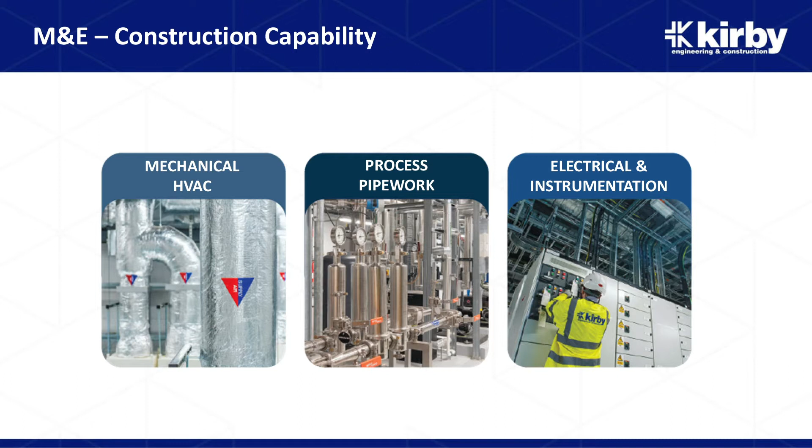Our trade labour split is 50-50 in Europe, and it's probably 60-40 in general across the business. As I said, we have a mechanical HVAC, process pipework, and electrical E&I capability.

And I touched on our transmission distribution. So again, we're looking at turnkey solutions there around the distribution network operators and transmission operators, renewables, large demand users. And we have a capacity up to 400 kV. We've done AIS and GIS substations, so it's all HV/MV transmission distribution networks.

And our commissioning - we have in-house commissioning teams and in-house engineering teams, which offers us a lot of value there for our clients and helps get this early contractor involvement going in the first place.

So I suppose today really is about technology and advancement and what's helped us to progress as a business. I'm going to focus on digital construction, touch on BIM capabilities, and Park is going to go into BIM a bit more on his side. I'm going to focus on off-site fabrication and how that's worked for us as a business in practice.

There's always learning, so we've had some key learnings from our large-scale projects, and we're moving on quite well as a business. We're going to look at integrated project delivery, in-house 3D modelling, detailed coordination, prefabrication, modularisation, how we've applied technology, and improved EHS and shared value back to everybody concerned, all partners on the projects.

The first thing is really to understand early contractor involvement, to understand what constructability and design issues can happen on our project at a pre-construction phase. It's to resolve the issues early so you don't carry it to construction, because what you don't want is a situation where there's multiple rework on your projects.

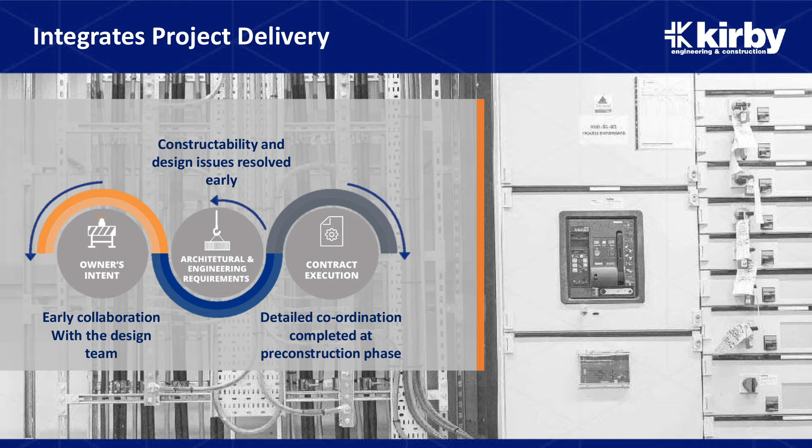We need detailed coordination, complete at the pre-construction phase. That's a full integrated solution for everyone involved, and we do need to understand what the employer's requirements are day one, so that we can get that collaborative approach. The more involvement we can get from all the key team members, and the support we can offer to a project, is where we add most value.

It's all about team collaboration. There's no one point of source here, or one point of truth. It's engineering, prefabrication, construction teams. It's about redlining, detailed coordination, and pre-construction, so early collaboration with project teams and design teams.

Pre-construction collaboration between Kirby's team, the FM and the BIM team. We can give visual representations once we take it into the BIM model. Sometimes we don't own the model. We have a preference to own the model because we have more confidence in the service we're providing, and sometimes it's quicker to take a model from scratch yourself and bring it all the way through to full LOD 500 and an as-built product, so our constructability and design issues can get resolved early.

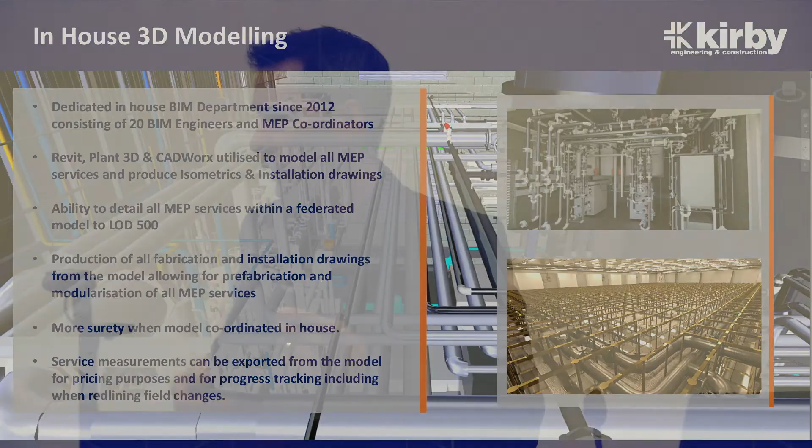Our BIM teams, from 2012, we had the opportunity on our large-scale project. We had 35 modelers. Rory and the guys asked, just over a quick bit of lunch, how many modelers worked on that large-scale project in Leixlip. There were 200 modelers working inside a room from multiple contractors at the time.

We had 35 modelers. We were learning, and we were getting more efficient as we went along. The churn rate now would take us a third of the time it would have taken initially, so there are learning curves, and you get more efficient over time and produce a better quality product.

We use Revit, Plant 3D and CADWorx to model all our services, produce our isometrics and 2D drawings out of a model, so you can look at clash resolution through the model. We have an ability to detail all the services, as I said, up to LOD 500. I'll touch on the LODs briefly in a minute.

We can produce all our fabrication and installation drawings from the model. Once we put all the services in there, we can get a dump out of the model and send it off for prefabrication, having confidence we'll be able to build to the tolerance levels allowed on the project. In Leixlip, the tolerance level on that project would have been up to 70 mil, so anything within that, you're clashing with other trade services.

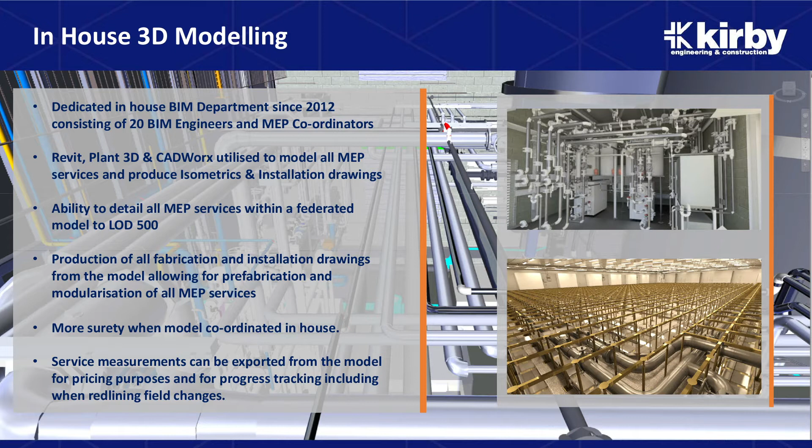We've more surety when a model is coordinated in-house, and again, service measurements can be exported from the model, so you can take a dump from a QS point of view. Being a QS myself, you can take a model dump of all the primary services, or sometimes the secondary services if they're on the model, and get your measurement, cost load quickly, and put it back through your schedules to track progress and efficiency.

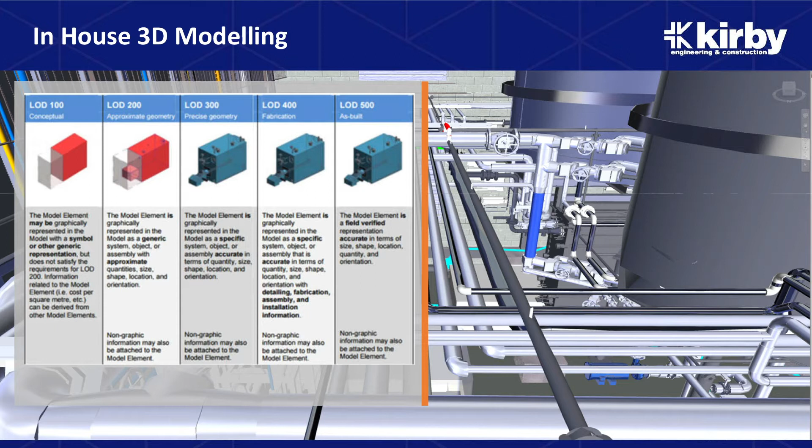The LOD 100 to 500 - are you involved at a concept stage? Is it approximate measurements or precise measurements you're producing? Are you going to build your model to a fabrication stage so you can produce 2D drawings and fabricate to those drawings with confidence? Or are you bringing it to LOD 500, taking it to full as-built, with total confidence in the product you're delivering?

All design information that we model is to a constructible standard. It reduces site time by using coordinated installation drawings, and it's all about reducing time on site.

We looked at our project in Grange Castle, which had north of 200,000 hours on the project. We wanted to achieve a minimum of 25% of those hours taken off-site.

So what we've done is we ended up off-site fabricating all the LV switch rooms. There's 24 of them in total, and they were produced with a partner up in Donegal. They basically came in sections of 4, into 3 co-locations in each of the 2 data centres we were working in, and they got bolted up together with all the services installed off-site.

They can be tested off-site, and all the quality inspections and everything can be done inside the fabrication workshops. So it avoids congestion on the site. That's the key piece - it reduces the management requirements on the site, and it just becomes much more efficient for the project.

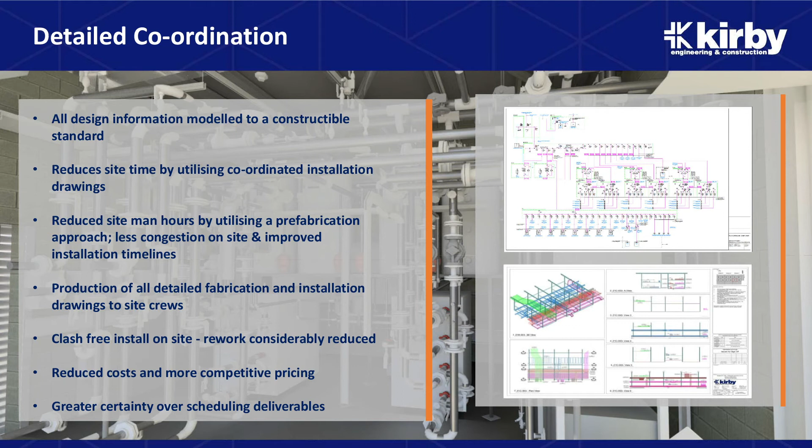So it's really about getting more surety. You end up producing 2D drawings which are there for fabrication. Our fabrication approach reduces on-site construction duration, reduces management costs and risk to the project, and results in a higher quality final product.

It's achieved in a factory environment. It saves costs - trades guys on site versus factory workers. There is a difference in cost there as well.

So the client would see the benefit of a more competitive price, and we would obviously be looking for savings ourselves when we go in - we go in with a tight price. All contractors need to make a margin as well.

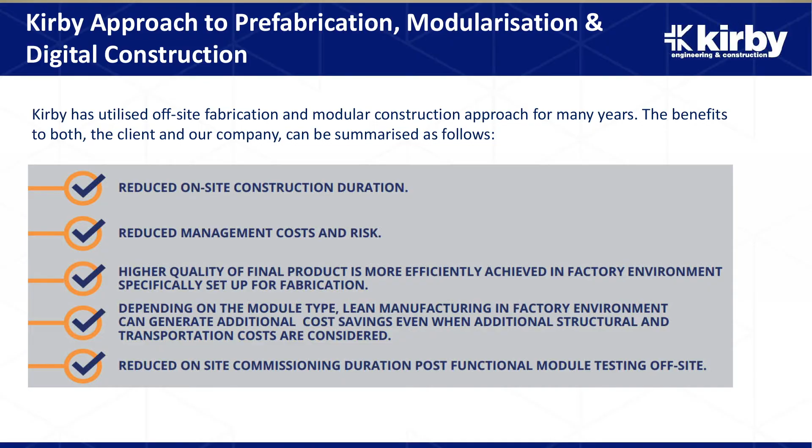So it's about lean manufacturing and cost savings, and when you take in transportation, sometimes off-site fabrication may not be cheaper, but it saves time, and the time to the project might be the most important thing. It saves the client costs in the long run, and it reduces on-site commissioning during the testing phase.

So the key to prefabrication, modularization, and the digital piece is early engagement, early collaboration between the teams. We get constructability and design issues uncovered and resolved at the outset, at an early stage.

We can give it through visual representations, we can take through the model once we have all the primary services and the primary routes on the model. We can have all the services.

The pre-construction collaboration piece is really important, because who owns the integrated model, and how much surety have we with the quality of the information in the model?

Detailed coordination is done through the BIM teams, through workflow, and it's about taking the design information to a constructible standard. It offers the opportunity to apply value engineered solutions to lean up the costs and the install, and it reduces man hours through coordination and man hours by prefabricating off-site.

We had a big learning back in 2012 with point cloud scanners. We did a project in 2012 - we were 60% through the project, and we were building a model and looking to resolve clashes through the model.

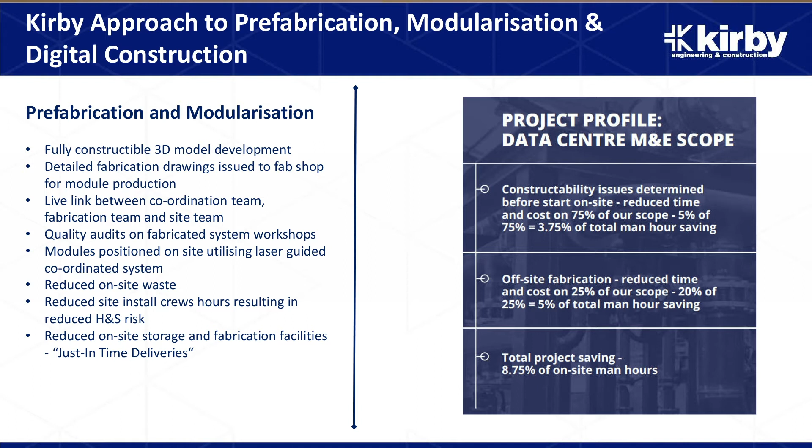It's laser coordination in the field, using point cloud scanners, and it's really about taking the risk off the site so that we can have a safer working environment.

A few examples for the company of off-site modularization: these are the switch rooms that were prefabricated and dropped into position, 24 of them for the company, fully containerized.

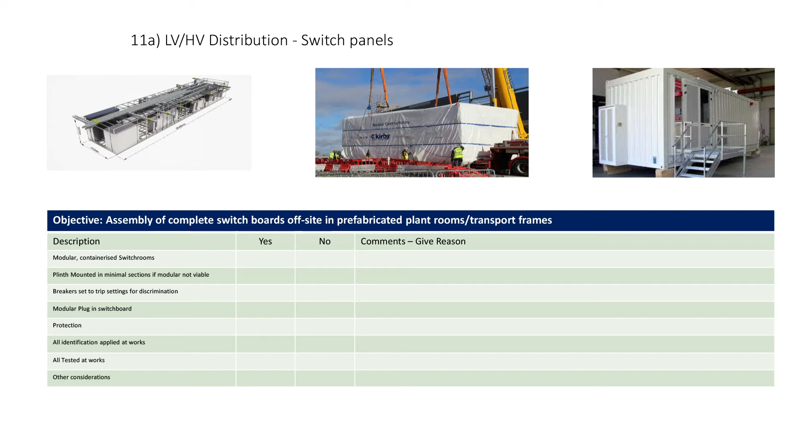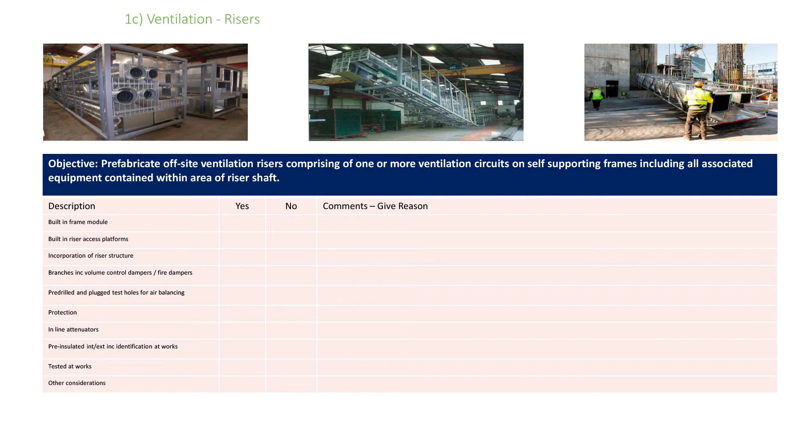Another example are prefabricated off-site ventilation risers for a bank project in Dublin. The risers were built off-site, dropped into the field, and the install time was much quicker. We could get the services into the building with much more efficiency, with full off-site testing.

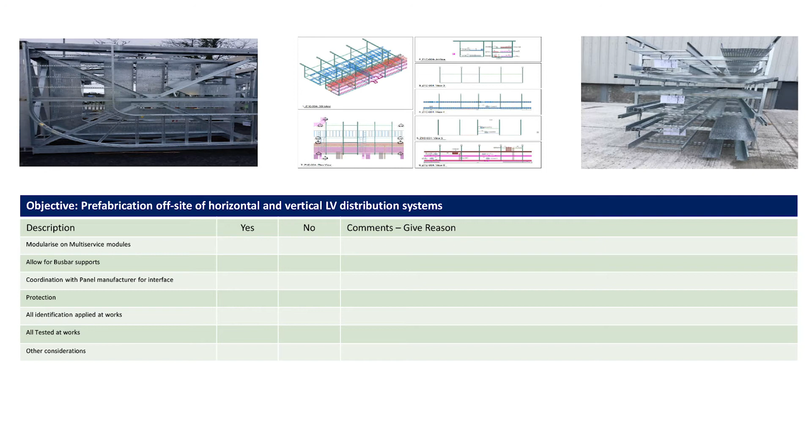The next one, we have prefabrication of horizontal and vertical LV distribution systems—cable containment, pipe racks. We have shared services that we put through our model, and we develop our off-site fabrication, which creates efficiencies for our business.

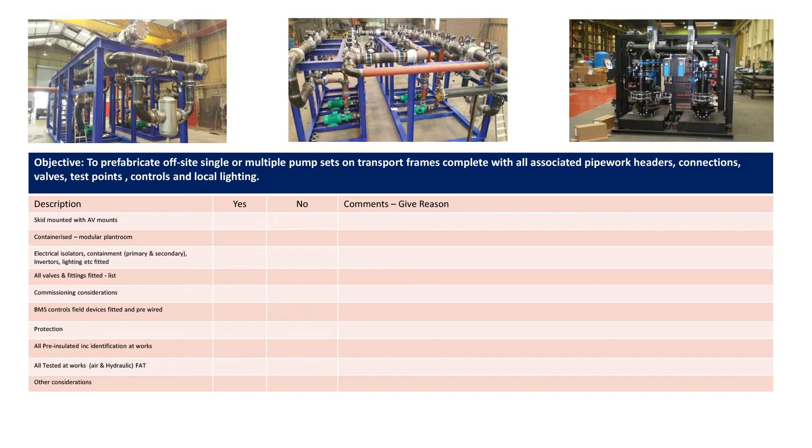A pipework solution where we have multiple pump sets on a transportation frame, so we bring our pipe headers and connections, with valves installed off-site, testing done off-site, NDT (non-destructive testing) done off-site, and controls in place. All you're doing is dropping these skids and pods into position and connecting up—much greater efficiency for the project.

Prefabrication and modularization involves having the ISOs generated directly from a clash-free federated model, bringing the drawings to the fab shop, linking through the Vault and software platforms, and installing complete on-site drawings and set-out points. We have robotic stations that we bring into the field, and they pick up data points, and we install to those points. All prefabrication is tagged and delivered just in time.

While our switch rooms, pipe racks, or risers are prepared off-site, they're brought in just at the right time. They can be stored in an off-site fabrication facility, so there's room to work all the other services around the buildings.

Again, we can get full quantities derived from our projects, so we get more surety around cost control early. We can get a model dump on the measurements, and then pick up changes. We can bring our 2D drawings into the field to pick up field changes and field measurement changes—though it doesn't take away from the fact you still have to measure your change on site.

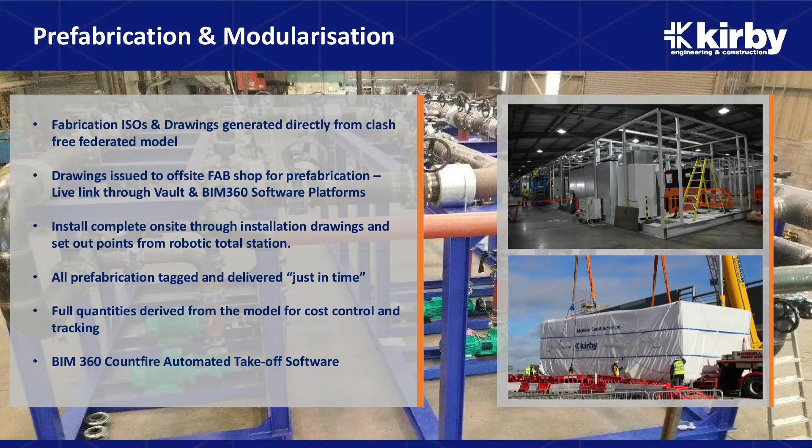BIM 360 Countfire is automated takeoff software, generally used by our estimating team. What you do is take first of a kind of all the symbols and measure those, and the system itself then picks up multiples of the same symbols. It's reasonably good—it probably brings it to 85% accuracy and has to be checked afterwards.

So we're looking at the off-site solution. I have a little video here now, and I'm hoping it works. This is a video of our modeled...

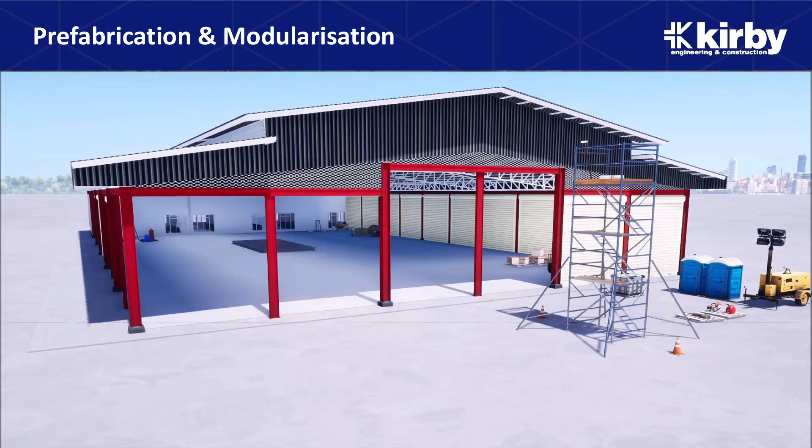...our modeled LV switch room. It's just to give an indication of what can be done—more a visual. Just to see, we had 24 of these dropped into position.

So I'll leave it there for you to have a look at it in a minute. We have all the LV switch gear, we have the frames, we have the busbar feeds, the power feeds coming into the panel, which are connected on site. We've 4 of these bolted together, so the busbar connections join the next switch room, and they join onto the power in the next switch room.

The BIM model gives you the opportunity to go in and look at coordinates within the switch room, so you can navigate around the model. You can look for clashes, and you can see the detail that's there to identify your clashes.

And then we just transport and drop into position on site.

For the business, I suppose the key to move forward for Kirby is really applying technology and trying to create greater efficiencies. It's to partner with other people who can offer and introduce more technology and also provide a supply chain.

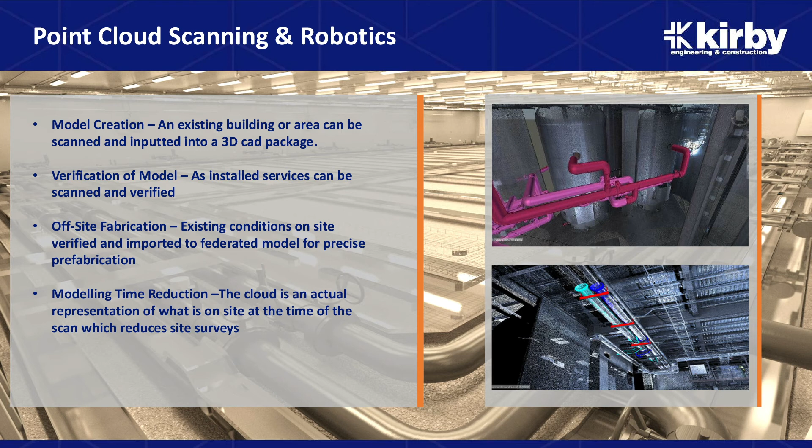Overall, what offsite fabrication offers our business is design for safety, offsite planning, greater visualization on our projects. We're looking at technology to carry out our online inductions, to centralize all our documents and data, and have live access to information irrespective of your location.

Safety control - digital checklists, mobile technology, and live reporting. So whether it's EHS reporting, quality QA, QC reporting, commercial reporting, progress reporting, earned value management reporting, it's all available there to the business.

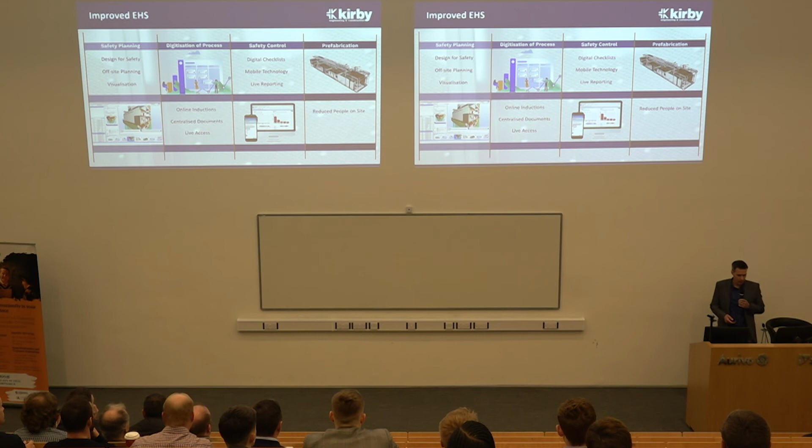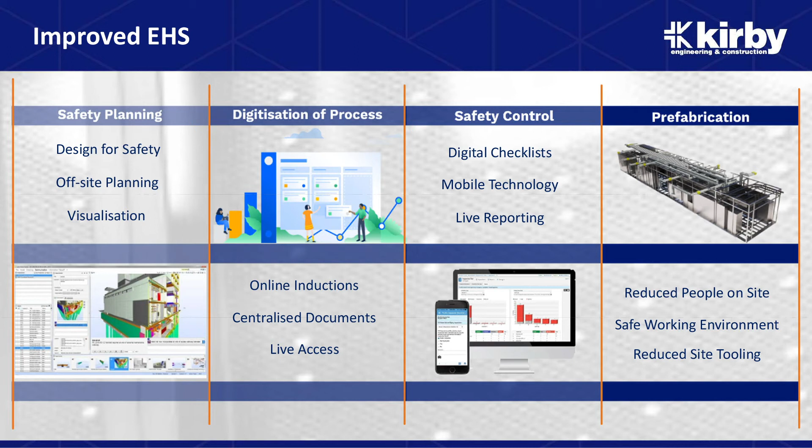Prefabrication, as I mentioned, reduces people's time on site, creates a safer working environment, and reduces the need for site tooling. So overall, what does offsite fabrication give you? Reduced site personnel, less waste, customer alignment, increased productivity, increased safety, improved quality, and for a client, really improved schedule.

As I mentioned, we're dealing with incomplete design. A lot of our work becomes remeasurable work. We take on jobs based on agreed schedules of rates, and we are looking at cost loading those schedules of rates to give cost surety to our clients.

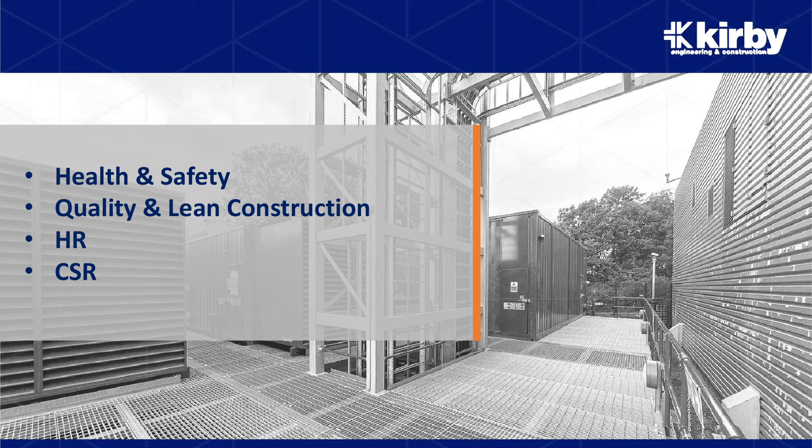From a business point of view, I just want to touch a small bit on health and safety, lean construction, and a little bit around HR and CSR.

From a safety point of view, 4 times in the last 6 years we've achieved 1 million man hours without any lost time incidents occurring. We'd 1 reportable in 2.3 million man hours in 2018, and 2 reportables in 2.5 million man hours in 2019.

We continually carry out behavioural safety workshops. It's all about a climate for improvement - continual improvement within the business. Again, we're ISO and OHSAS certified.

From a people side and from a well-being side, it's about the culture, it's about the people within the business, what we want in the company. When we invest in people and hope for people to stay in the business long term, we're all proud of our own companies that we've worked with for a long time, and we can see the development with our own companies.

We want younger people to be future managers in our business, so it's incumbent to focus on succession planning and people's health and well-being. We know there's strain and pressure when looking at compressed timelines, so we are focused on people's well-being, with ongoing health checks available to our people. EHS leadership - we're looking at targeted training, coaching, and leadership skills.